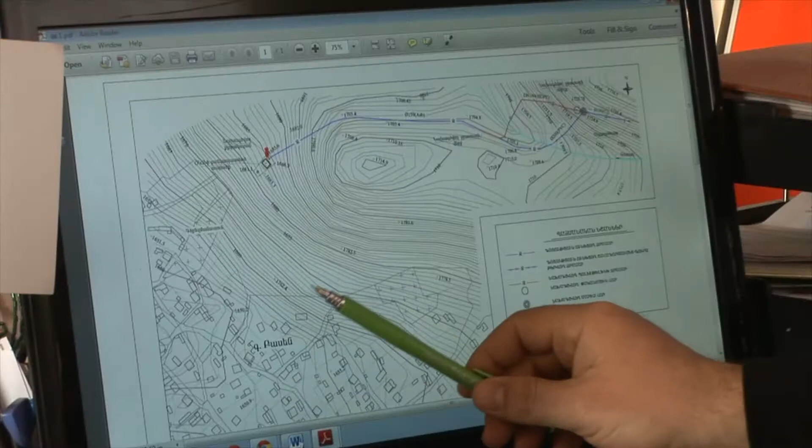Now we see a part of Basen community where the daily regulation reservoir's location and a segment of the water main to be constructed is seen.

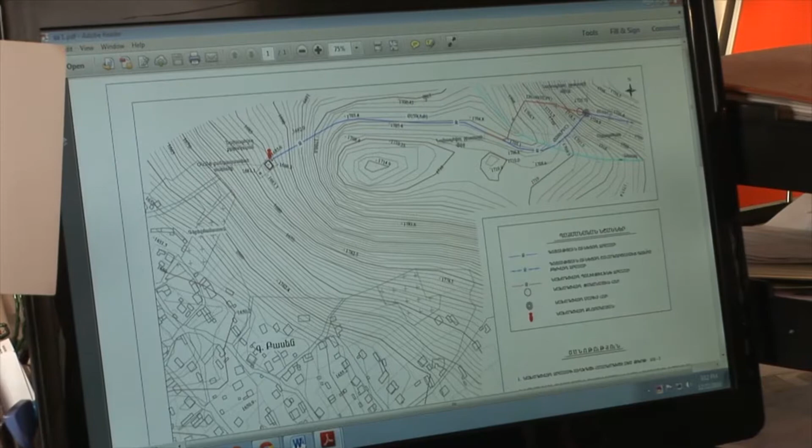Construction of a chlorination station is planned under the design and the area of the daily regulation reservoir, which will operate with calcium hypochlorite powder.

Chlorination equipment will be installed in a chlorination station, where the chlorine lime will be prepared and pumped by means of dosing pumps into the water main, supplying the daily regulation reservoir.

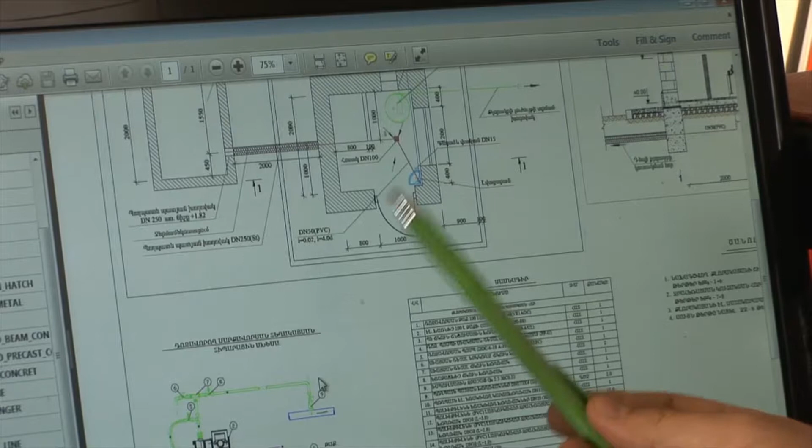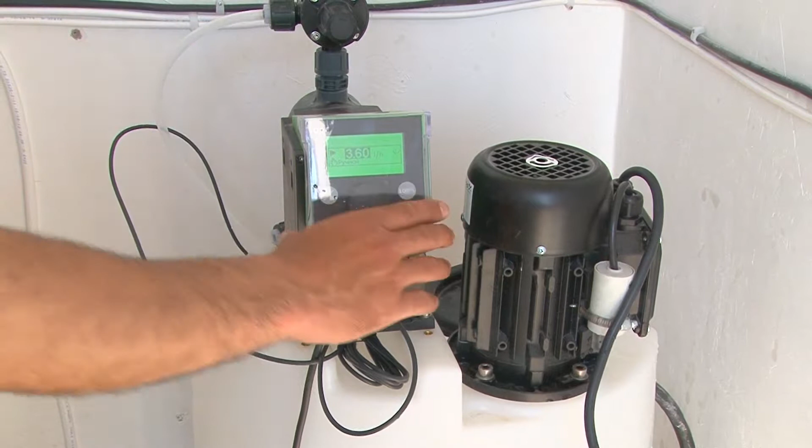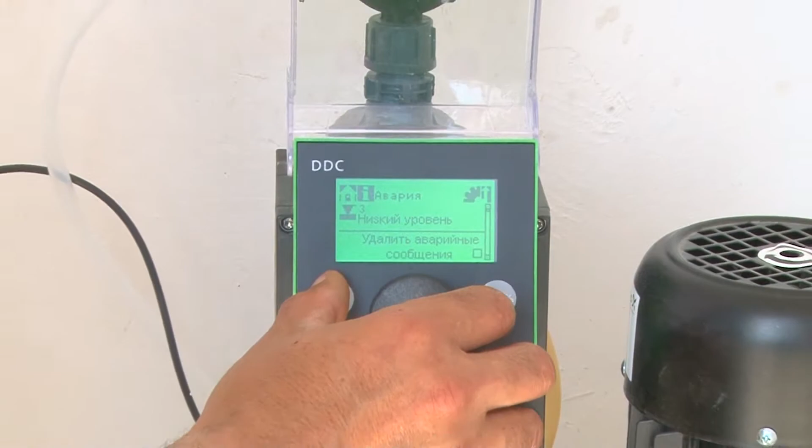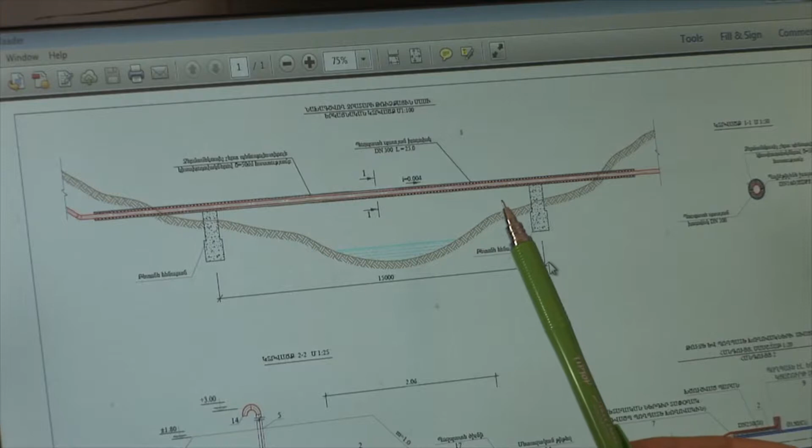This drawing shows the span part of the water main in the part of the storm drainage gorge. The span segment is about 15 meters. This segment has concrete supports. Besides, thermal isolation is planned for the water main in the overground part to protect it against freezing. A steel casing pipe is planned on a water main.

Full reconstruction of the mentioned 255-meter-long segment is planned under the design. This segment will be buried, following all the requirements for burying of the main related to the depths, etc.

The community residents highly appreciated the activities carried out within the framework of the project and were always ready to support this process. During the 1.5-month-long construction, the community provided food for the workers, and the community volunteers were involved in various construction works. One of the most important achievements of such project was the change in mindset of community residents, which inspired the younger generation to solve numerous inner community problems and make the community a better place for themselves and other fellow villagers.

We consider our community a bit different from the other communities because the whole network of introducing alternative technologies in our community is a step forward. We have tried to use solar energy, we have used thermal energy. At present we have small workshops for producing fuel from waste. We have greenhouses, we have small biogas workshops. All this is a part of community development.